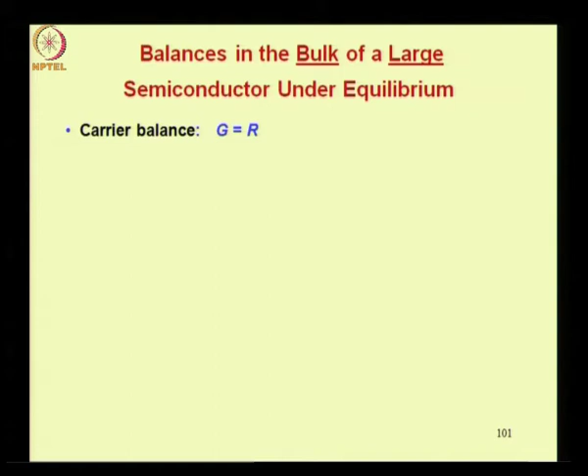What is the statement of momentum balance? We said equilibrium means no net flow of charge. This is actually a statement of momentum balance or momentum density balance. No net flow of charge implies no net momentum density of carriers, given by the relation n into mn into v, where n is the concentration of electrons, mn is the effective mass of electrons, and v is the velocity of the electrons.

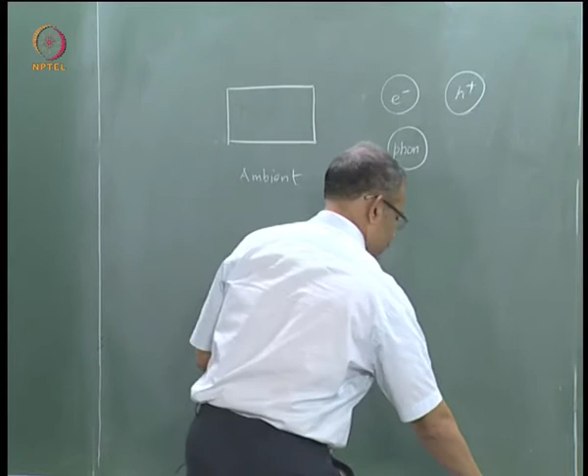So suppose this is the semiconductor and this is the ambient. Now inside the semiconductor you have populations of electrons. Conceptually let me show them as separate: electrons, holes, then phonons, photons.

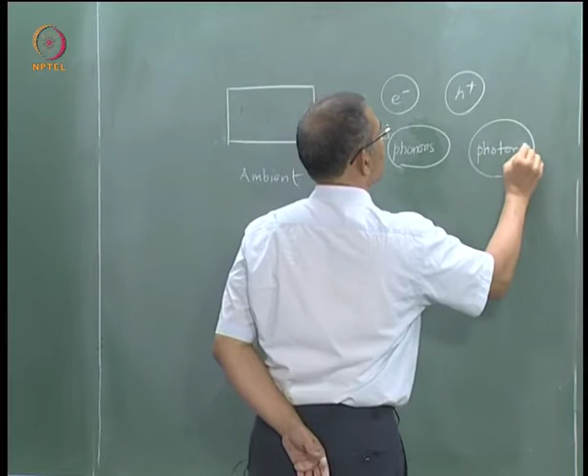So this is inside the semiconductor, right? You can have photons outside also, so in the ambient you can have photons too. That is why it is important to regard that here we are talking about photons inside the semiconductor.

Now these are the populations. This is a conceptual picture, because really if you see spatially it is not as though some part is electrons, some part is holes, some part is phonons, some part is photons. No, they are all mixed up.

So conceptually what we are saying is energy density of this population is same as energy density of this population. For these populations the energy density would be kinetic energy density, and this is same as energy density of this population and this population, so that there is no net exchange of energy from any one population to any other population, right?

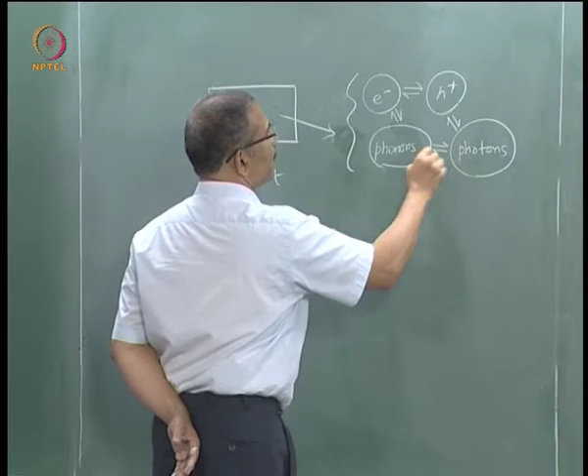So even though there is energy exchange, yes certainly, because this is an equilibrium state, an active, dynamic state, but there is no net flow of any sort, right? So this is the statement of equilibrium.

A student has a doubt here: Sir, should there be an energy transfer or interaction between holes and phonons?

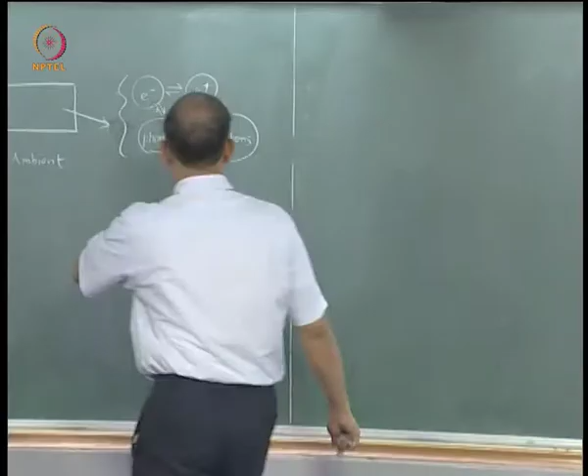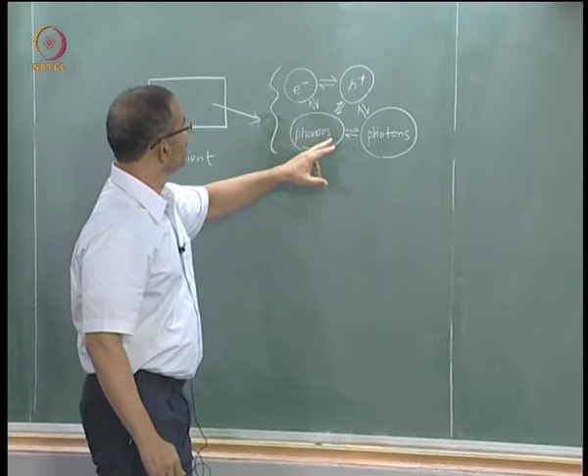Okay, your doubt is regarding this figure here. In fact that is a good point you have made. I should have shown an energy exchange between holes and phonons also. In fact, there is an energy exchange, as you said, between every two, so you can have energy exchange between electrons and photons as well.

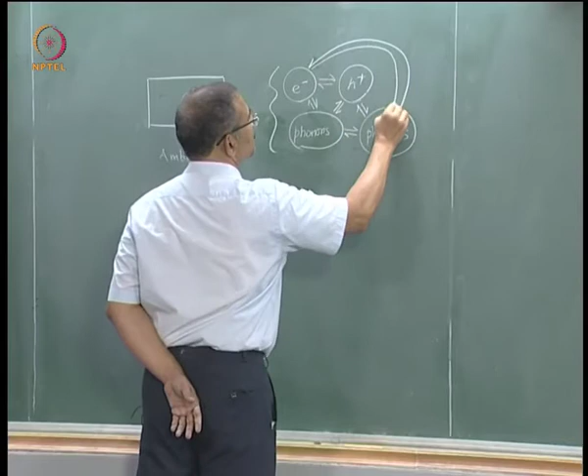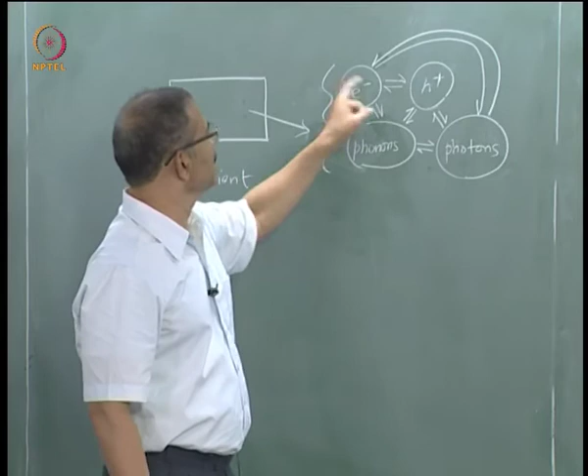So I should in fact show something like this, like that. There should be an arrow between every pair of entities here: electron-hole, electron-photon, electron-phonon, hole-electron, hole-phonon, hole-photon, photon-phonon, photon-hole, photon-electron, right. So thank you for that.

Let us proceed further with the discussion. A nomenclature: equilibrium value of Wn is denoted as Wn suffix 0. So with that we have completed the picture of the balances under equilibrium: the carrier balance, momentum balance and energy balance.

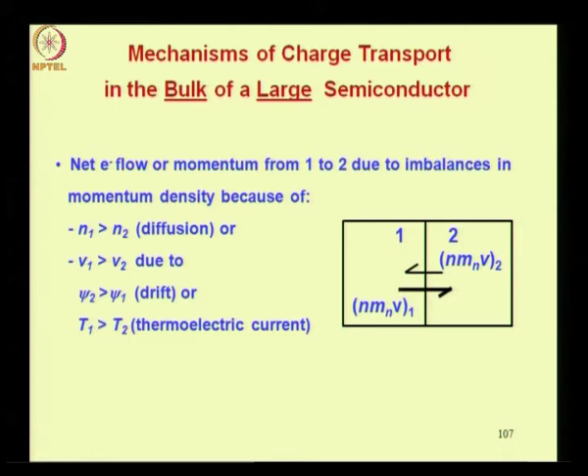Now here we can regard the temperature as lattice temperature, but later on, as we will see, we will introduce the concept of carrier temperature, and strictly speaking the T1 and T2 shown on the slide should be regarded as carrier temperatures. So you see we are able to explain the diffusion, drift and thermoelectric currents based on the simple model of momentum balance.

So I should slightly reword my statement - not that we are able to explain the entire current flow, we are able to explain how directed motion can be superimposed. That part alone we can explain based on momentum considerations.

Let us similarly explain how we can explain velocity saturation. Velocity saturation is the same as momentum saturation, because momentum density is given by the velocity into the carrier concentration into the effective mass of the carrier. So we will use velocity and momentum density, these two words, interchangeably sometimes.

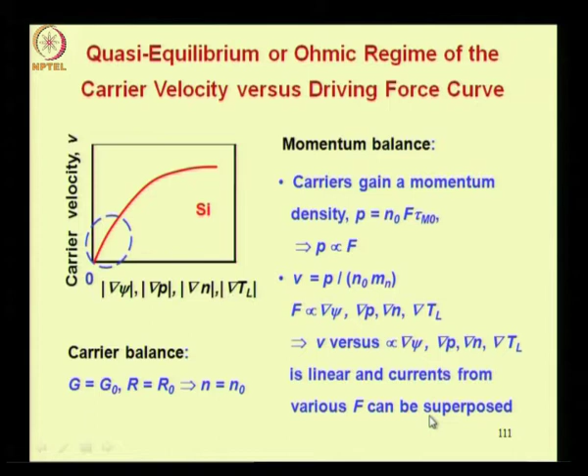If you club this statement P proportional to F, V equal to P by n naught mn, and F proportional to these gradients, we derive the conclusion that the velocity V versus these gradients should be linear, and currents from the various forces can be superimposed. So that is a crucial result: the velocity is linearly related to the driving forces, and if multiple driving forces are present we can simply sum up their consequences to get the overall velocity.

Now let us look at the energy balance picture. Carriers gain an energy density between collisions given by the carrier concentration n naught into the velocity of the carrier into the force into the energy relaxation time. The energy density is force into velocity - force into time is momentum, and you multiply that by velocity to get the energy, and since it is energy density you multiply by the concentration.

One important point to note is that the time constant used here is the energy relaxation time, which is different from the momentum relaxation time used for finding how much momentum a carrier gains between collisions. We introduced energy relaxation time, momentum relaxation time, and mean free time between collisions earlier, and pointed out that momentum relaxation time is more than the mean free time, because not all collisions result in randomization of momentum in all directions. Some collisions only deflect the carrier very little, so they do not affect the momentum much. So the carrier has to undergo more collisions to lose the momentum, and even more collisions to lose the energy.

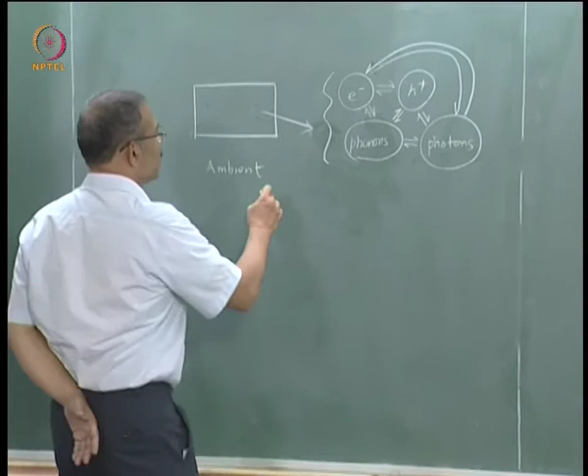Going back to this diagram, this is the picture under equilibrium, and in fact I should have added one more arrow, that from the semiconductor to the ambient there is also no energy exchange. You put all these populations inside here and then show one arrow from ambient to each of these populations - that is the picture under equilibrium, and the same picture also continues under quasi equilibrium.

Therefore the arguments so far imply negligible net flow of energy from carriers to phonons to ambient, and therefore also the scattering rate is unaffected. Because the energy density of carriers has not changed, the scattering rate, which depends on energy, is also not affected. Recall that momentum relaxation time and energy relaxation time are related to the scattering rates, which have to be derived from quantum mechanical considerations, and they depend on the energy density of the carriers. So since scattering rate is unaffected, the momentum relaxation time is same as that under equilibrium, and the energy relaxation time is same as that under equilibrium. This is the condition of energy balance.

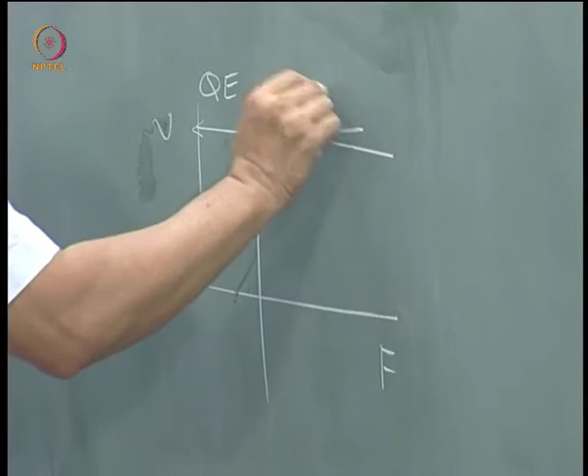Now the carrier balance under this consideration is the same as under quasi equilibrium, that is G equal to G naught, R equal to R naught, and therefore N equal to N naught.

A comment is made here that though in this particular case the generation rate and recombination rates are not affected, if the force is very high, as happens for example with very high fields, then impact generation can be present, which will increase the generation rate and increase the concentration N. So it would no longer be equal to N naught. In our case we are not entering into that regime where the generation rate is affected.

The momentum balance: what is the momentum balance picture? Carriers gain a momentum density given by P equal to N naught F tau m. So all that happened as compared to equilibrium is tau m has changed from tau m 0.

That is the equilibrium value. Now tau m is less than tau m 0, momentum relaxation time has decreased, since tau m decreases as energy of the carrier increases. This is a result from quantum mechanics.

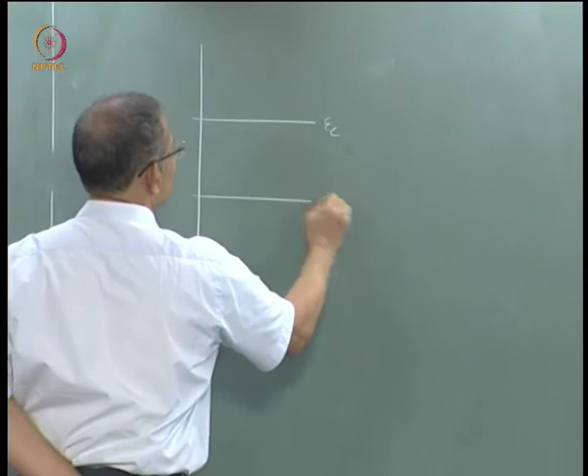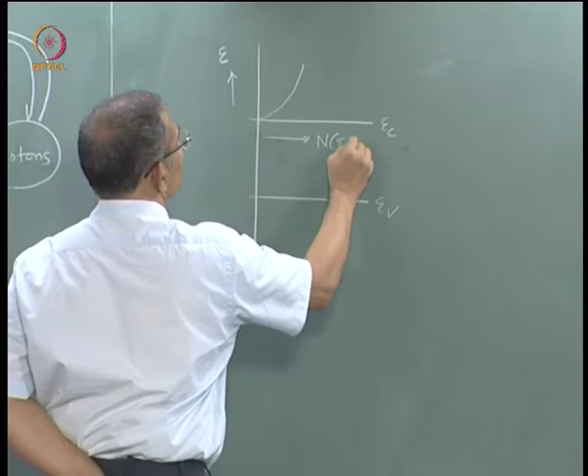If you recall diagrams like this: this is the conduction band edge, this is the valence band edge, and you plot a density of states function like this. So this is energy and this is the density of states function N(E), and the number of states in any energy interval dE is given by this.

So you can see that more the energy, more the number of states. In a simple way we can say that if carriers have high energy, then they have more states into which they can scatter, and therefore the scattering rate is more. If the scattering rate is more, the number of scattering events is more in any unit time, so the time associated with each scattering would be lower. That is why tau m is less as compared to under equilibrium.

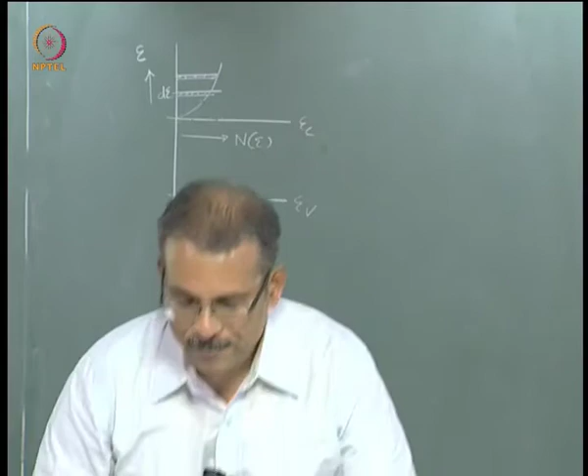Now the consequence of this is that the P versus F curve tends to saturate. Because tau m is decreasing as F increases, the product F into tau m is not increasing linearly, it is sublinear.

Now again, following the equilibrium arguments, the velocity is given by p divided by n naught mn, and the force is proportional to these gradients. So putting these three things together, the velocity versus the gradients also tends to saturate.

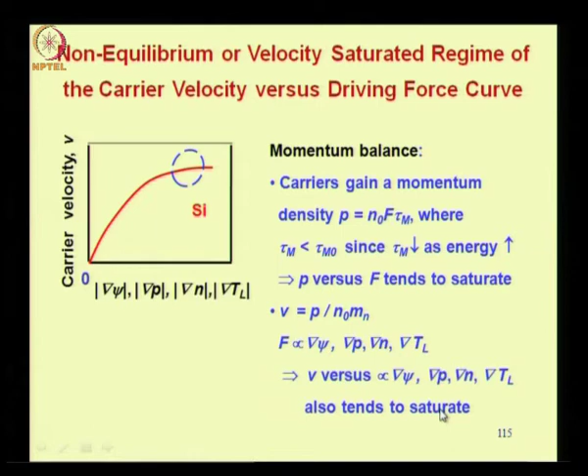In fact, this should have been explained at the time of discussion of the equilibrium case also, because there too we had used a dot product. This dot is really not important if the situation is one dimensional, because in that case the product of the vectors is simply the product of the magnitudes.

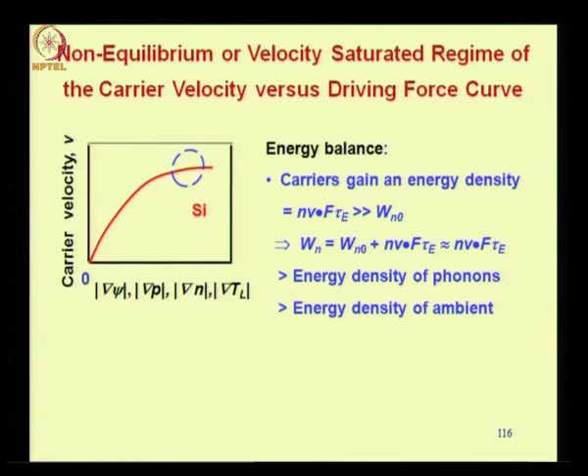So this energy gained from driving forces is much more than the equilibrium kinetic energy density. This is really the statement of non-equilibrium: that the energy gained from the driving forces is much more than the equilibrium kinetic energy density. The statement of quasi-equilibrium is that this energy gained from the forces is very, very small compared to kinetic energy density under equilibrium. Converting this into an equation: Wn is equal to Wn0 plus Nv f tau e, and this sum is approximately equal to Nv f tau e itself.

Now this energy therefore will become more than the energy density of phonons. This is where the equilibrium has been disturbed, and also the energy density of phonons will be more than the energy density of the ambient. Okay, so let us understand this fact.

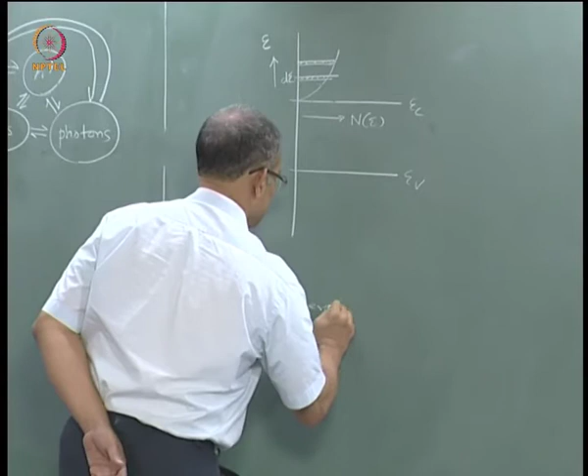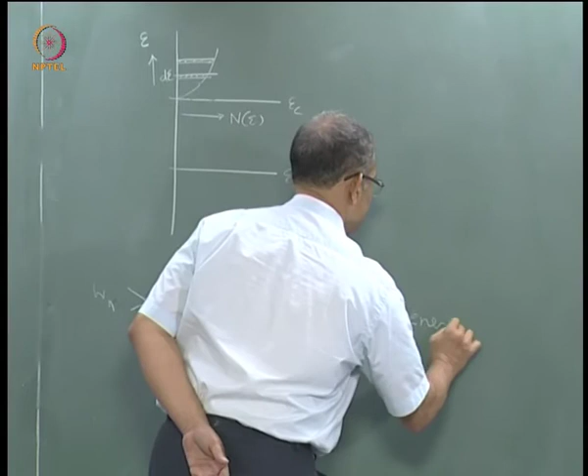So we are saying that Wn, that is the kinetic energy density of electrons, is more than the energy density of phonons, which is more than the energy density in the ambient.

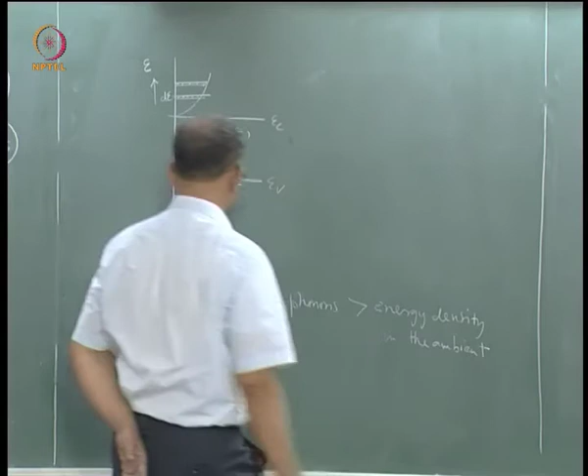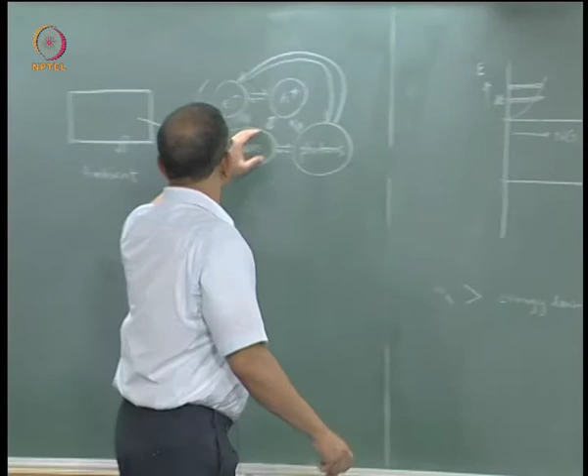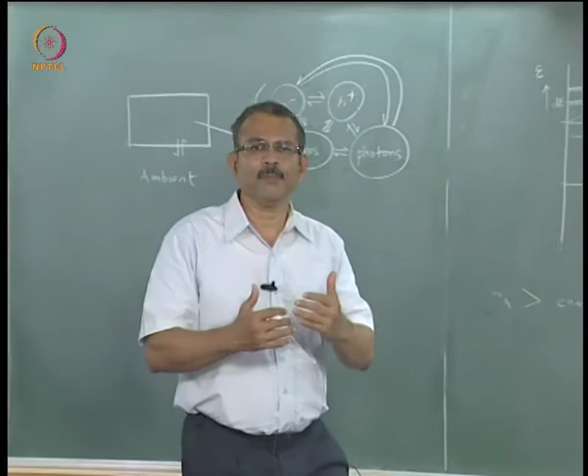So there is a net energy transfer. The carriers are gaining energy directly from the driving forces, since phonons cannot gain energy from these forces directly - the forces act only on the carriers. As the carriers gain energy, since their energy far exceeds that of phonons, there is an energy exchange between the various populations. Whatever we say between electrons and phonons also applies between holes and phonons, so we should extend the arguments. Since carrier energy is increasing compared to phonons, when this energy exchange scattering occurs between them, some energy transfer takes place.

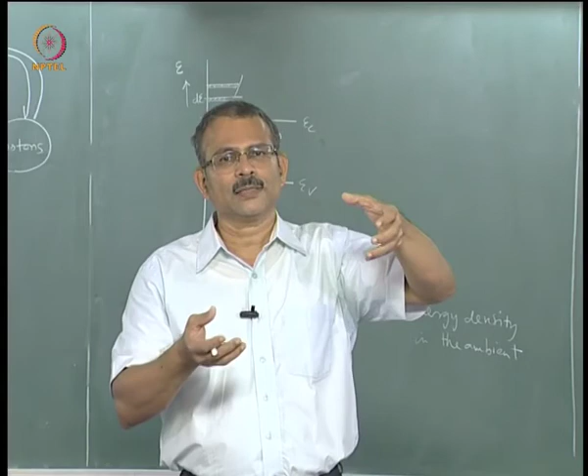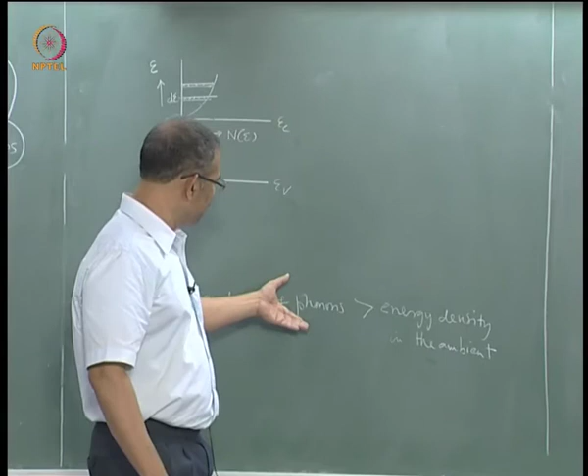And therefore the phonon energy also increases above the equilibrium value. However, it always remains less than the carrier energy, so that there is a differential that allows energy transfer from carriers to phonons. So energy transfer is from force to carriers, from carriers to phonons, and then from phonons the energy is transferred out into the ambient. Therefore the phonon energy is more than the energy density of the ambient.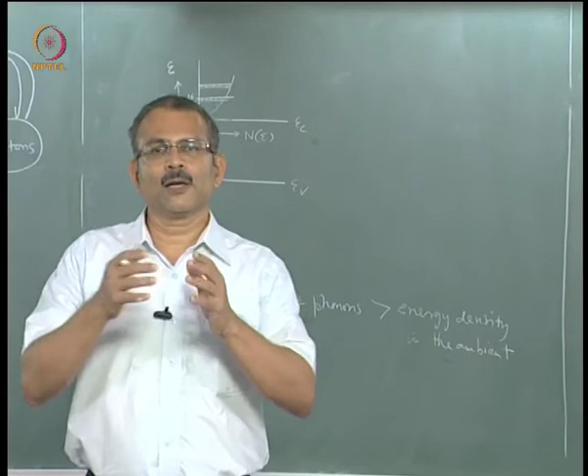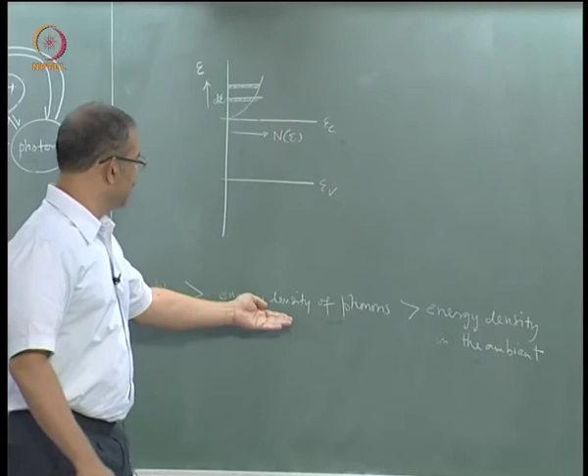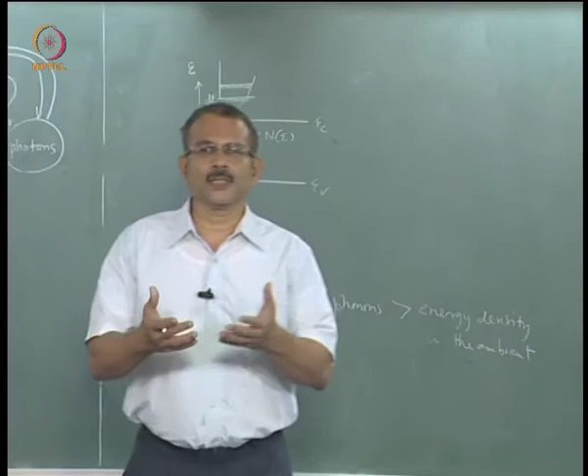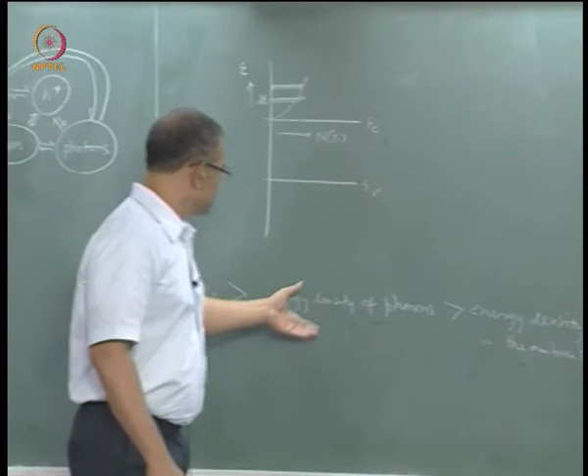This series of energy transfers explains why under non-equilibrium or high driving force conditions the semiconductor sample gets heated up. What is happening is that heating up is really the increase in energy density of phonons as compared to ambient, because unless this gets heated up compared to the ambient, energy transfer cannot happen from the phonons to the ambient. Now energy of phonons is nothing but energy of lattice vibrations, so that is the lattice temperature. That is how the semiconductor temperature increases, allowing it to transfer energy to the ambient.

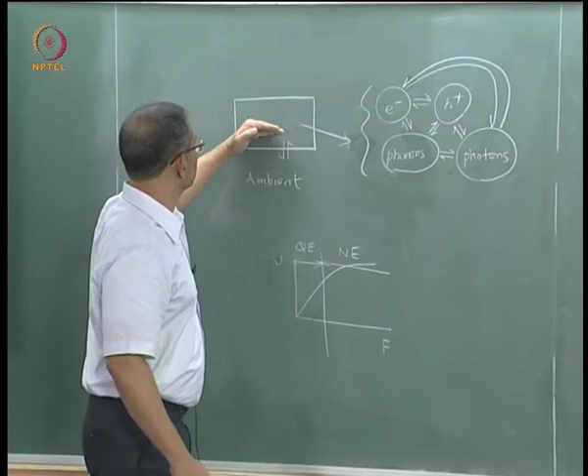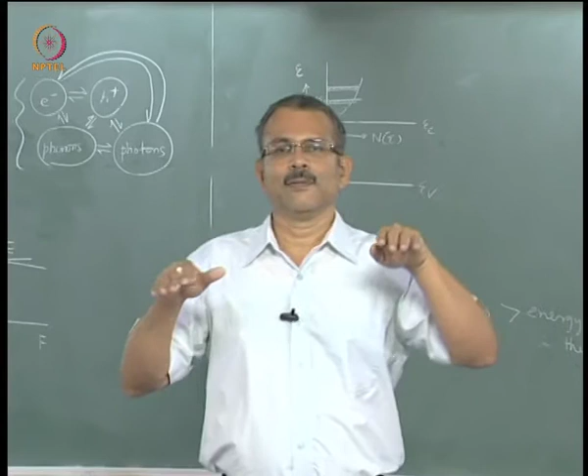Under steady state, this energy transfer should be such that all things stabilize. So under steady state, the carriers will have a high kinetic energy density as compared to phonons or lattice vibrations, and these will have high energy compared to the ambient. In terms of this diagram, the temperature here is more than the ambient temperature, so there is a series of energy transfers possible. Under steady state, this energy transfer will ensure that the various energy densities stabilize, but always this order will be maintained: kinetic energy density of carriers more than energy density of phonons or lattice vibrations, which is more than the ambient energy density.

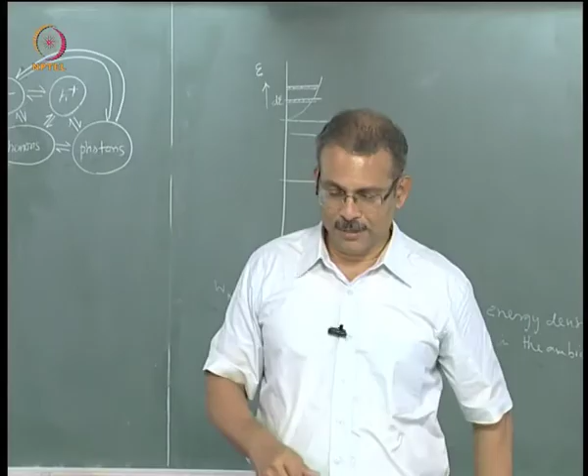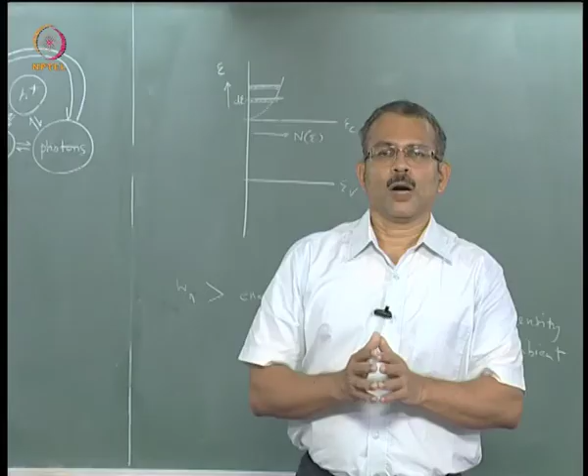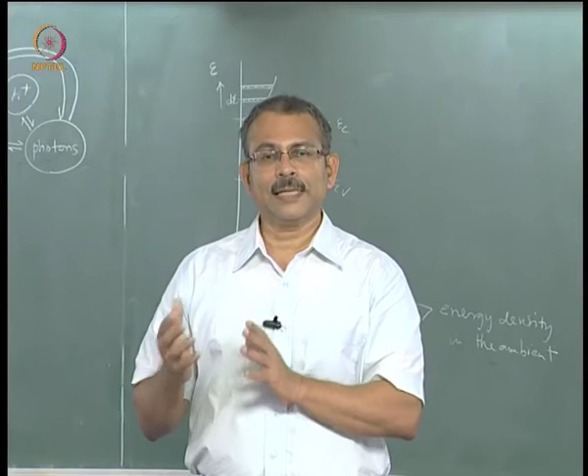Now as a result of increase in energy density of carriers, another consequence is much change in scattering rate. That is, tau m and tau e differ very much from the equilibrium values of tau m 0 and tau e 0. We have already argued how tau m decreases. It turns out that the appropriate scattering mechanisms, if considered from quantum mechanics, show that the energy relaxation time can in fact increase with increase in carrier energy. We will just accept this fact as a result from quantum mechanics.

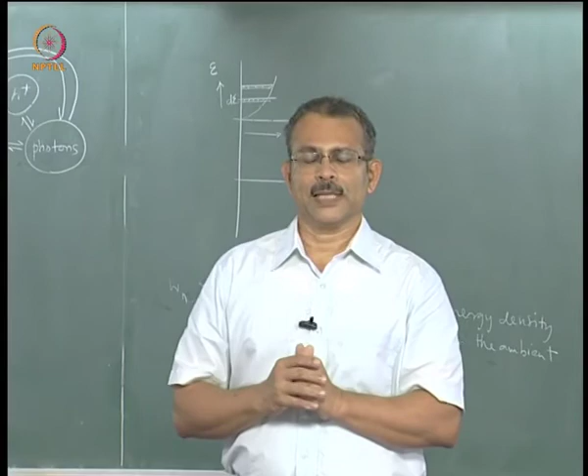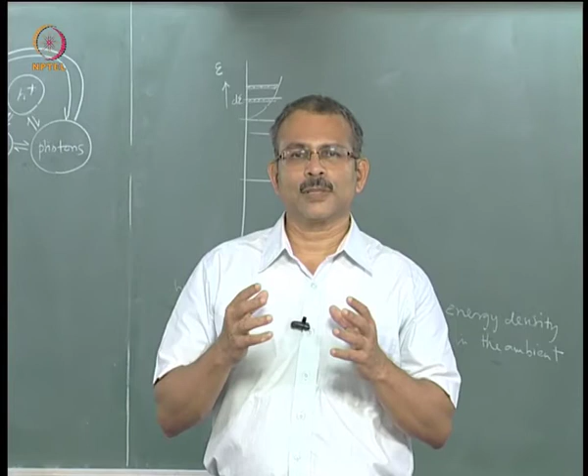Now let us consider an analogy illustrating the energy balance between carriers and phonons. Since this is a very important topic, we want to make ourselves comfortable with how the energy exchange happens between carriers and phonons, because the scattering of carriers by phonons is responsible for many of the effects.

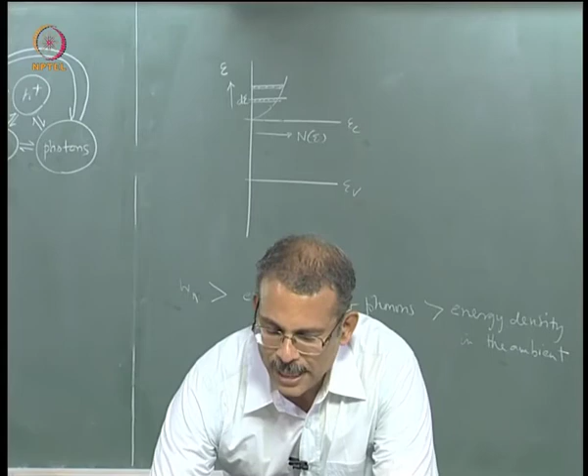So here we have shown two situations, a low driving force and a high driving force. The analogy basically involves filling a tub consisting of a can with holes, with water from a tap. The water input into the tap is like the energy input, and this water, when it falls into the can, passes through the holes in the can and gets into the bucket or container.

Now when the driving force is small, it is equivalent to a small energy input - you open the tap very little so the water falls very slowly. What you will find is that through the holes the water quickly gets into the larger bucket, so the water level inside the can and inside the remaining part of the bucket would almost be the same. The water level here is only slightly higher than the water level outside.

Now as against this, if the rate of energy input is large, that is if you open the tap very much, the water comes out at a very fast rate, and so the water level in the can is much higher than that in the bucket. No doubt the water is coming out of the holes, but it cannot come out at that very rapid pace unless the water level in the can rises, because once the water level in the can rises, more holes become available through which the water can flow out.

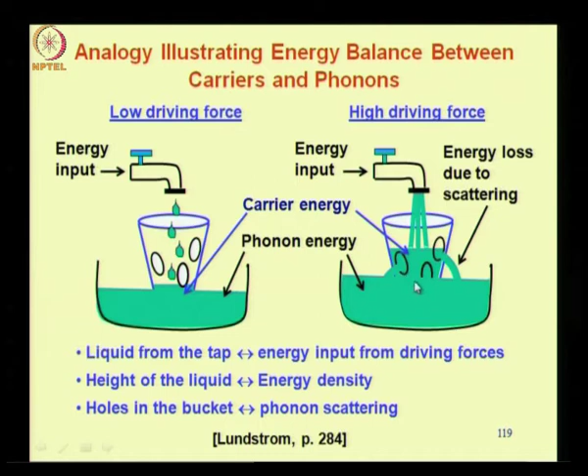Okay, so this explains why the carrier energy is higher than the phonon energy when the driving forces are high or the energy input is large, and the difference between the two levels will be more when the energy input is more. In fact, one can very loosely associate a temperature with the height of the water level.

Now, to help you understand whether you have got the analogy illustrating the energy balance between carriers and phonons, here is an assignment for you. Extend the analogy illustrating the energy balance between carriers and phonons to illustrate the energy balance among the carriers, phonons and ambient. So I want you to add ambient to the picture.

Okay, so you have to show how water from the tap gets transferred from the can with the holes to the larger bucket, and then from the bucket to the ambient.

We will now introduce an important concept, namely that of carrier temperature. This concept of carrier temperature is analogous to the concept of lattice temperature, which all of us are familiar with. So in fact, whenever we talk of temperature of a solid, we are talking of actually the lattice temperature. So when I touch an object and say that it is hot, it means the lattice temperature of the object is more than the ambient temperature or my body temperature.

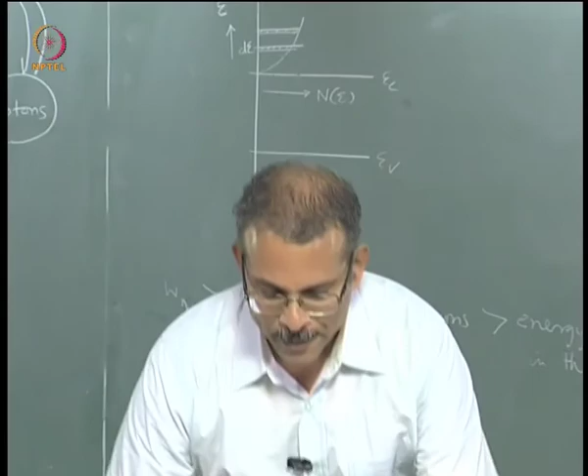So we have a temperature for the lattice, and similarly to represent the energy density in the ambient we have the concept of ambient temperature. We are already very familiar with the lattice temperature and ambient temperature ideas, so it should not be difficult to extend our understanding to the concept of carrier temperature.

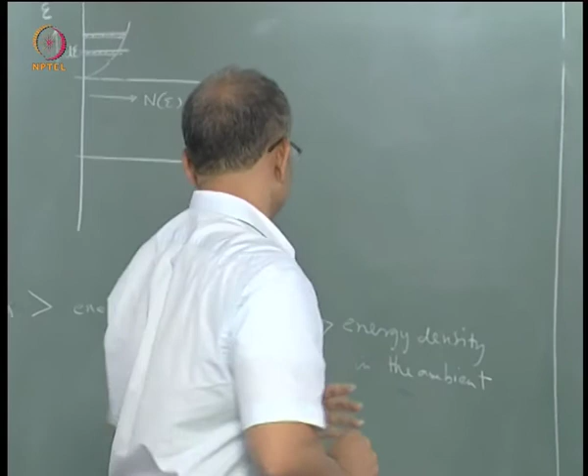Let us write an equation for the carrier temperature. The kinetic energy density represented by W can be separated into two parts, the random component and the directed component. Now this is very crucial to the concept of carrier temperature. The carriers are all moving randomly, and there is a directed motion superimposed over random motion because of some driving force. What we are doing is we are separating the energy associated with random motion and associated with directed motion.

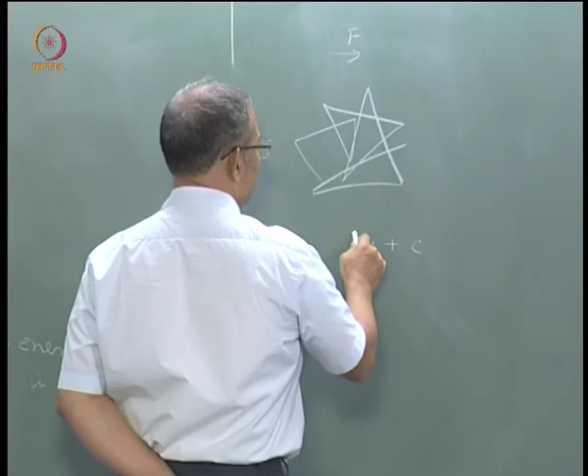Okay, how can you do that? Well, if you consider the velocities, namely the drift velocity and the random velocity, and say that the velocity of a carrier is separated into two parts, and if you square this you will get the terms Vd square plus 2 Vd C plus C square.

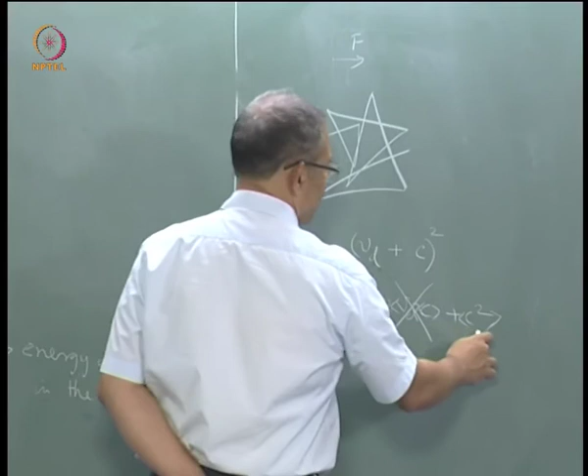Now when you average this for all carriers as represented by these arrows, then the average of the random component is 0, therefore this term goes away. The average of the square of the random component however is non-zero. This will give rise to the root mean square average. Similarly the average of the directed component square is also non-zero. So really this is what represents the W drift or W directed, and this is what represents the W random.

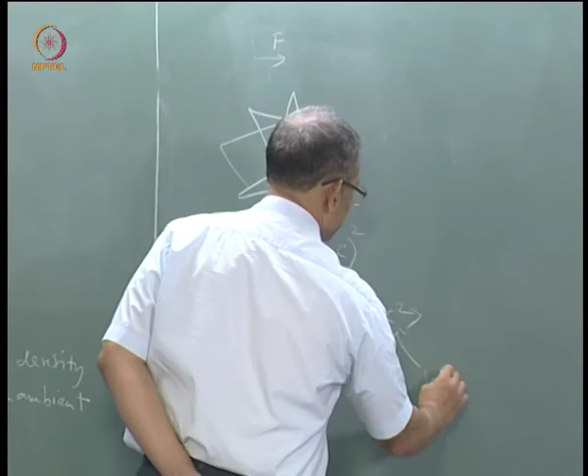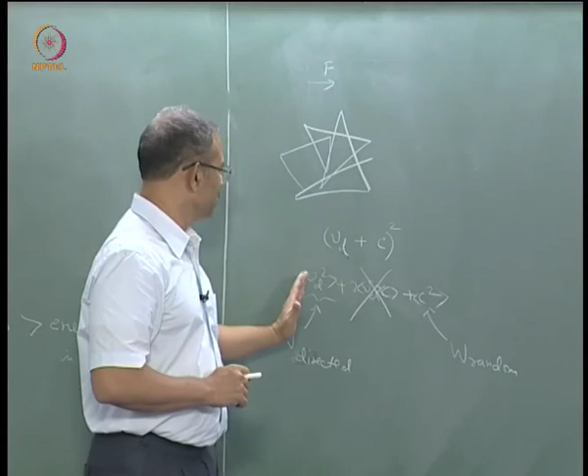There are more details of this derivation which are beyond the scope of our course, but this explains how I can separate the energy components into two parts. This separation is also talked about in terms of thermal energy and drift energy. Directed energy is also called drift energy, random energy is also called thermal energy. Now one clarification: the word drift here should not be associated with the drift current alone. The word drift really means directed energy - it can be because of diffusion or because of thermoelectric current also in this nomenclature for energy.

Now it is the random component that we convert to temperature. Since this is energy density, you have the electron density coming in, otherwise except for this term n, it is a familiar equation: 3/2 times Boltzmann constant into the carrier temperature. You know that the average energy of a phonon is written as 3/2 times the Boltzmann constant into lattice temperature. Similarly the average random energy of a carrier is written as 3/2 times k into carrier temperature. Because we are talking of kinetic energy density, the electron concentration is coming in there. So it is to be emphasized that only the random component of the energy can be associated with the temperature.

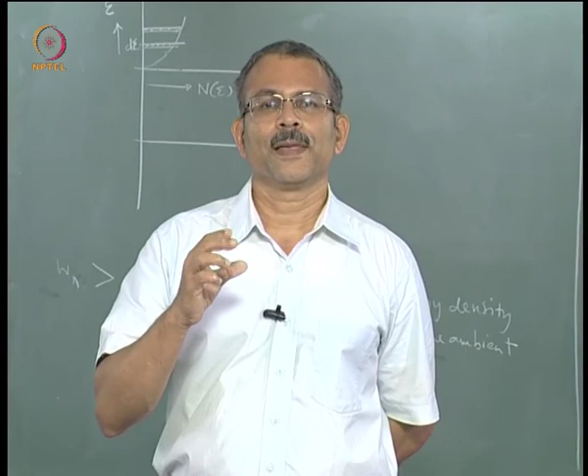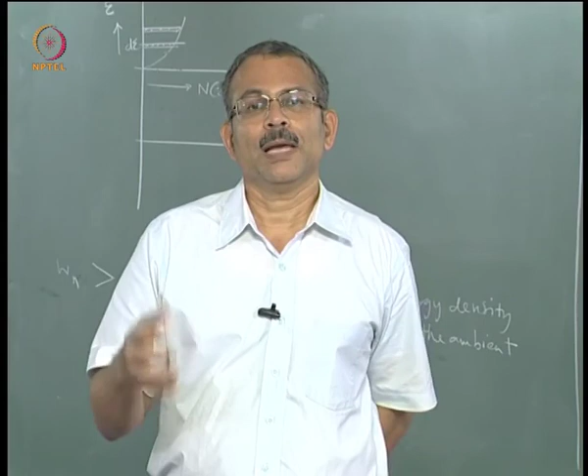So that is the concept of hot carriers. Please do not misunderstand hot carriers as carriers in a hot semiconductor. No, the lattice temperature may be equal to the ambient temperature, but carrier temperature can exceed the lattice temperature. So hot carriers are carriers with high kinetic energy in maybe a cold lattice.

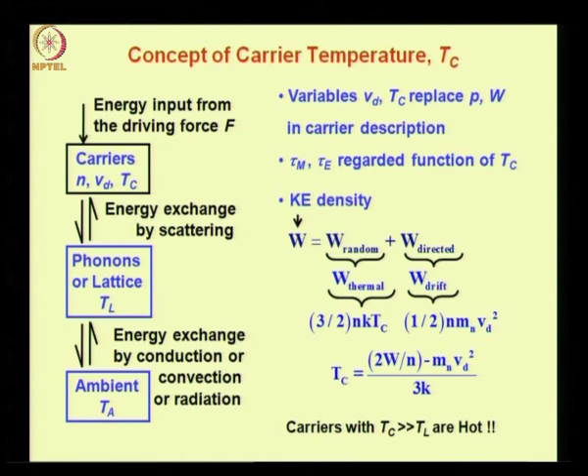Okay, so we have come to the end of the lecture. Let us make a summary of the important points. In this lecture we talked about carrier momentum and energy densities of carriers, and we said how we can analyze carrier motion in terms of the balances of carrier momentum and energy densities. First we explained the meaning of these carrier balances under equilibrium.

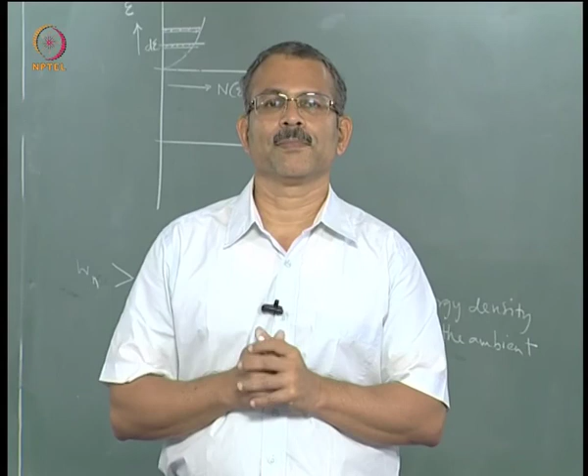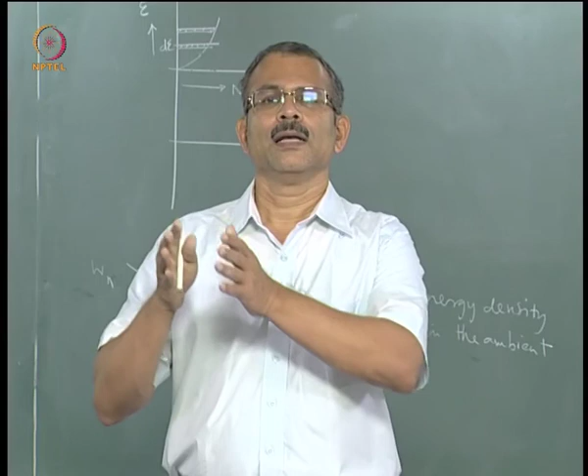Then we showed how, based on momentum balance considerations alone, one can explain the various forms of carrier transport, namely drift, diffusion, and thermoelectric current. Then we took up the carrier velocity versus driving force curve and separately explained the low driving force or quasi-equilibrium region, which is also called the ohmic region, and the non-equilibrium or high driving force or velocity saturated region. For these two conditions we laid out the statements of carrier balance, momentum balance and energy balance, and explained how the whole shape of the curve arises and can be understood in terms of these balances.

Since the energy exchange between carriers and phonons is a very important phenomenon based on which many effects can be explained, we gave an analogy to illustrate how the energy balance between carrier population and phonon population comes about. Finally, we introduced the concept of carrier temperature, in which we said that the random energy associated with the carriers can be expressed in terms of an equivalent temperature, in much the same way as the random vibrations of the lattice - the energy associated with these vibrations can be expressed in terms of a lattice temperature - and the energy density in the ambient can be expressed in terms of the ambient temperature.